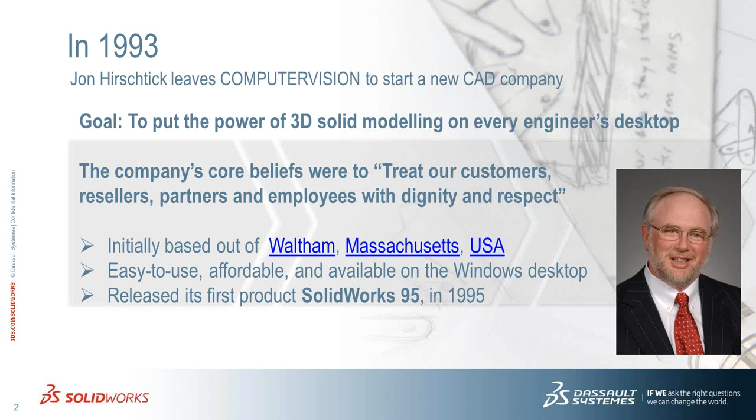They released their first product in 1995. I think they started development in '93, and the first product came out as SolidWorks 95 in the year 1995. It was easy to use, affordable, and available on Windows desktop, which at that point of time was unheard of.

Today we are looking at SolidWorks 2014, the latest release, and throughout these 22 releases, the SolidWorks development team has continued to exhibit four different traits. They continue to put the user first—as I said earlier, at least 90% of the enhancements come from user requests. The goal was to create a single unified user experience across functionalities like parts, assemblies, drawings, and even simulation and design automation. Everything happens in a single window, which was again a first of its kind—taking the impossible and making it really easy to use.

That is something you notice in SolidWorks if you've been following it for quite some time. Over the course of time, they have built a very incredible community. I'll talk about the community, how big and vibrant it is—it can be users, developers, or resellers. It can be anybody, but the community is very strong, and they help each other out in more ways than possible.

So let me talk about SolidWorks 95, the first ever release of SolidWorks. This was a game changer, because they changed the platform from a Unix-based system to a PC Windows-based system. By doing so, they brought solid modeling to every engineer's desktop, and the cost came down from a mammoth $18,000 to $4,000.

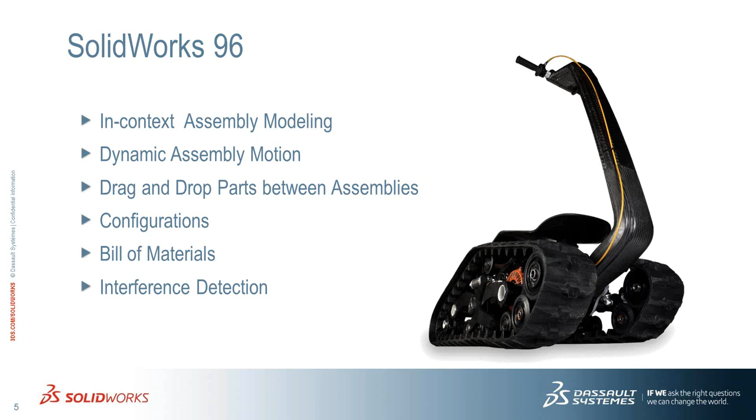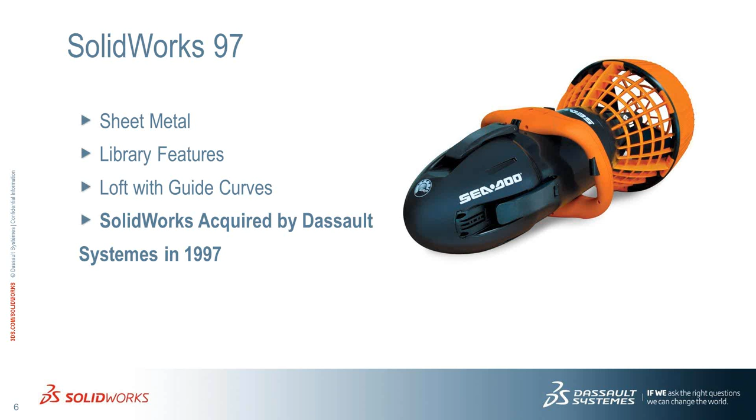In 1997, they introduced sheet metal functionality and started developing the design reuse part, which revolves around things like library features, where you can save a particular feature in your design library and reuse it whenever you want. They also had new functionality - loft with guide curves. This was the year SolidWorks was acquired by Dassault Systemes, in 1997. Dassault took over SolidWorks, but SolidWorks retained its own identity - the corporate headquarters stayed in USA, and the development team is still based there.

Then we had SolidWorks 97 Plus, where configurations were extended to sub-assemblies and assemblies, and you had customized exploded views. Also in 97 Plus, a new product was introduced called SolidWorks Viewer, offered free of cost. Today we take these viewers for granted, easily downloadable from the internet. But back then, being able to view a 3D CAD model on any desktop without any cost involved was a pretty revolutionary development.

There was also some more enhancement around welds and face fillets. By the way, if you've noticed, I've put some pictures on my screen which are all designs from our customers - they're all rendered inside SolidWorks. I'll talk about rendering when we come across it. So if you're wondering what those pictures are about, those are all rendered SolidWorks models or designs.

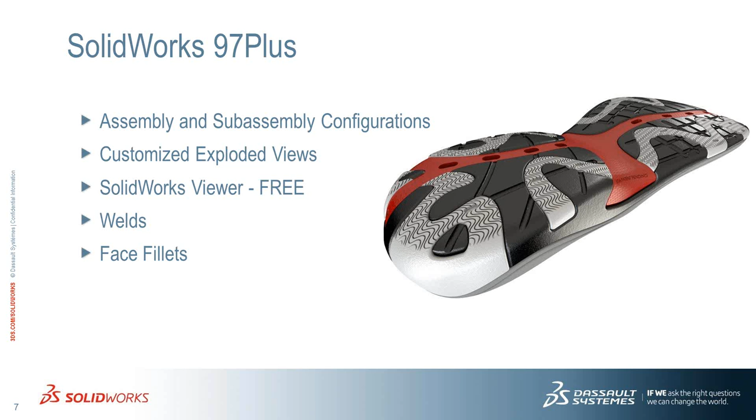In the year 1998, we introduced Feature Palette. This is again a very interesting feature. It's not there in its own original form today, but it has been modified. And they introduced sketch diagnostics.

Back in the day, in 1998, most of our SolidWorks customers came from AutoCAD. So when you're in a 2D environment trying to create profiles and you end up missing something, your sketches are open, so problems like this were easily fixed using sketch diagnostics. And we had assembly envelopes and some tangency control for lofts and sweeps.

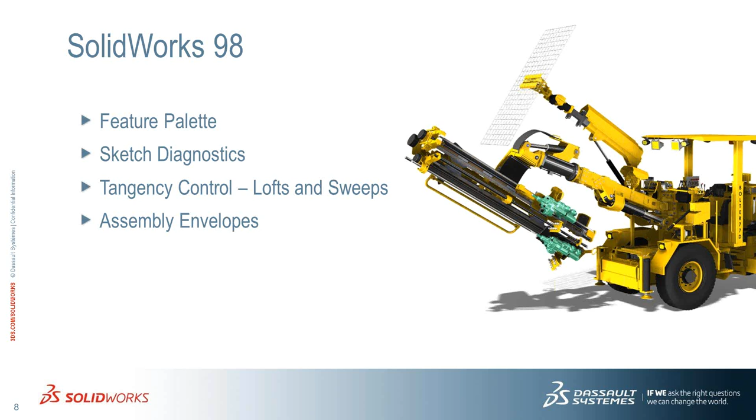98 had one more release, 98 plus. Here we introduced SmartMates. SmartMates continues to be one of the very strong points as far as assembly modeling is concerned. We can just drag and drop the component, and SolidWorks will figure out or suggest a mate that is right. If you want to overrule it, you can do it, but it gets it right most of the time.

By the year 98, assemblies got bigger, so the hardware could only support so much. So you need things like making the assemblies lightweight, making the designs lightweight. So they introduced something called lightweight components.

98 plus was a year release where they introduced surfacing and also something called FeatureWorks, which still continues to exist today. This was very important, very critical, because you have to have the ability to talk to other CAD formats.

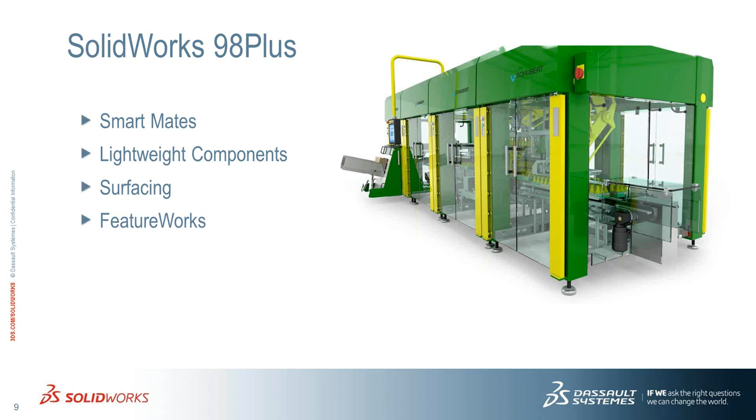You need to have that ability to translate or import other CAD formats, because before SolidWorks there were a couple of other 3D CAD packages, and you already had so much 3D CAD data. So to be able to convert those customers into SolidWorks, you need this functionality, called FeatureWorks, where you can bring in other CAD files and recognize the features and store it in native SolidWorks format. This was very critical to be able to capture most of the audience.

And in 1998, they introduced the first ever Certified SolidWorks Professional exam. Back in the day, it was a written exam where you had to be physically present at a reseller office or at SolidWorks to give this exam, and you'd be given some models to design, and then you'd be graded on them.

So it was a pretty lengthy process, and a lengthy exam as well. I think it spanned around 8 hours, if I'm not wrong. But now it is much simpler. It has gone online. You can take the exam right from your living room.

It's a very big development from 1998, and also the first ever SolidWorks World was held in Palm Springs in the year 1999.

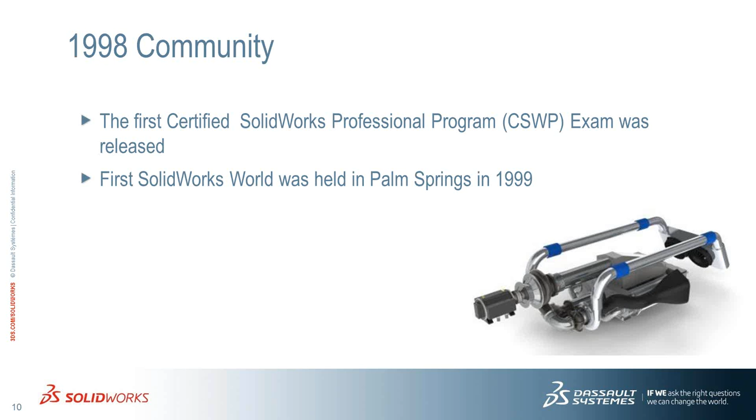If you are aware of this, SolidWorks World is an annual event where SolidWorks brings its entire community together. That involves the SolidWorks team, the reseller teams, the partners, the customers, even the education community as well.

And in the year 1999, SolidWorks introduced real-time collision detection. This is a feature where when you have motion built into your assemblies and you move around components, it will detect a problem like a collision, so that you can get your assemblies or designs right the first time.

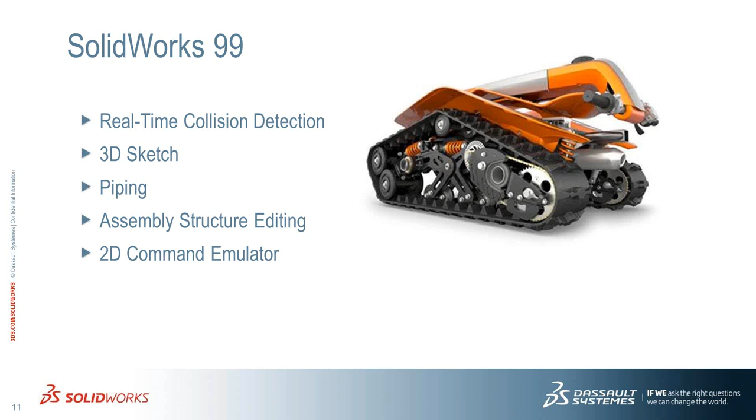This was a year where 3D Sketch was introduced, and with that came the piping functionality. We also had a 2D command emulator. Also, the assembly structure could be edited.

2000 was a big release because it brought in a lot of functionality, quite interesting, quite popular at that time. Even it continues to be very popular today, is something called eDrawings, using which you can share your 3D designs or 2D designs with anybody in the organization. You don't need to have a CAD license on that system, and it's a free-to-download product from day one.

And we have a brand new Hole Wizard interface in 2000, which allowed you to use standard holes complying to a lot of different standards like ANSI, ISO, and Indian standards.

Surfacing was developed, and the first ever SolidWorks Explorer was released. It continues to exist today. It's a very neat application. I find it very useful as compared to the regular Windows Explorer. As I keep telling people, Windows Explorer is fine for your Microsoft Office files or regular Windows files, but when it comes to CAD data, you need a specialist, and that's what SolidWorks Explorer is all about.

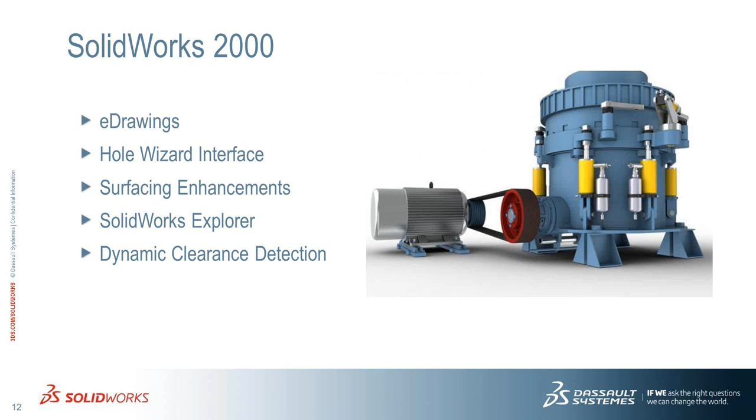And in the year 2000, they introduced something called dynamic clearance detection. I think a lot of people still are not aware of this functionality. It's a very interesting way to figure out the clearance. If you have moving components and want to do it dynamically, it will predict the minimum clearance at any given point of time and the maximum clearance.

In the year 2001, we introduced mirror components, and the user interface was revamped, and you could start seeing that the user interface is getting much easier to use. The heads-up user interaction, where you have the contextual menus popping up as you keep modeling or as you keep going about your day, reduces the mouse movement to a great extent, and it also speeds up your design process. And in the year 2001, you have flexible subassemblies, which is very important to be able to predict the accurate motion.

And for the first time, we had an import wizard developed for your 2D files, DXF or DWG files, using which you can convert your 2D to 3D very easily. And 2001 Plus was also on similar lines. You had more and more physical dynamics added into the system. So now, if your components have moving components, you have things like gravity and friction built in, so that you're trying to predict the actual behavior of your components in real working conditions.

As I said, the assemblies got bigger and bigger as we delved into a lot of different verticals like power, process and plant, and oil and gas. So there was a need to develop something like a large assembly mode, which again today is quite popular. You can use it to load your files faster, to work with them faster. And 2D to 3D glass box functionality was introduced here. This was very critical because most of the customer base was coming from 2D. So we had to give them something to convert their 2D models into 3D very easily. This is a functionality where you can bring the 2D drawing into the SolidWorks sketch environment and use the glass box functionality to bend those views and create a 3D model out of it.

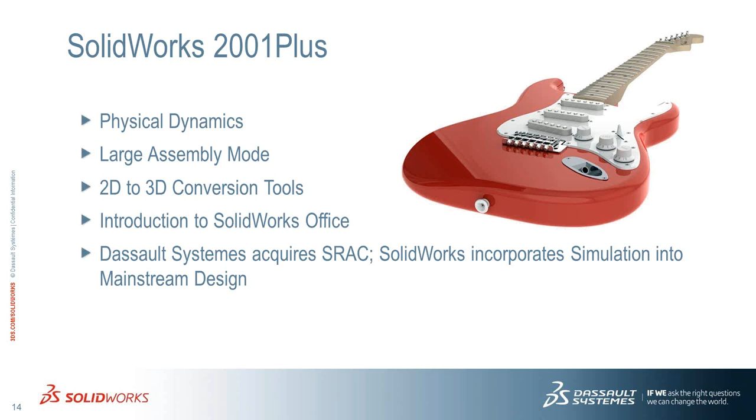And this was the year the new product called SolidWorks Office was introduced, and also in the same year, Dassault Systemes acquired SRAC, which brought simulation into mainstream design. I think this was the biggest development around that time, because back in the day, simulation or analysis was a huge giant, which was nowhere related to CAD because it existed independently and the teams were different. But the vision of SolidWorks was to put the power of analysis or simulation into the hands of the designers, and now that you look at it, you can say that they were very successful in doing so.

Next release was SolidWorks 2003. The first Express tool comes out in the form of COSMOSXpress, which today is called Simulation Express, using which you can do part-level structural analysis, where you can figure out your stresses, the deflection or the displacements in your parts based on, let's say, the loads applied and the boundary conditions.

And also a brand new web portal called 3D ContentCentral, which is a repository of all the standard components that you buy off the shelf, was created. The idea was that if you are buying, let's say, 20 to 30% of your components from outside, you don't have to design them. Let the people who are selling the components design them and share the data with you so that you can use them straight away in your designs.

And Contour Select was introduced in 2003. I'll show you some of the enhancements and talk about Contour Select and how it is used. And multibodies were introduced in 2003 along with PDMWorks, which is data management. When data becomes huge, you need a way to manage that data, so that's how PDMWorks got in. And the new product called SolidWorks Office Professional was released. Now we don't call it Office anymore. It's just SolidWorks Standard, Professional, and Premium.

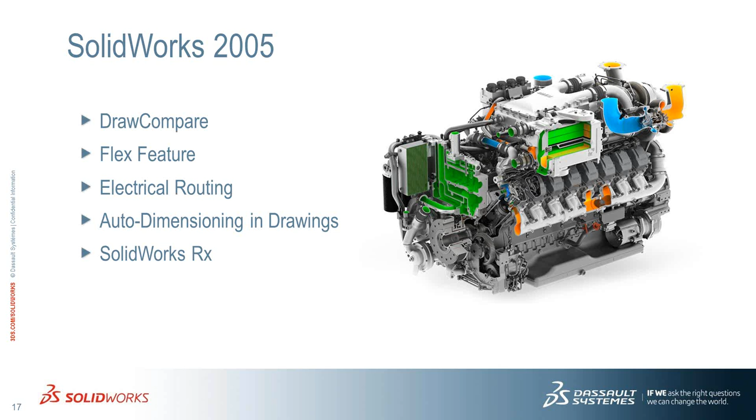So same thing with any application, especially engineering intensive applications like SolidWorks. They got stabler over the period of time, and to be able to support the customers and the resellers or even the developers to pinpoint or diagnose the exact issue, whether hardware related or software related, SolidWorks RX was introduced, and even today we continue to use RX in a very efficient way to diagnose and pinpoint the problems.

2006 was a big release because I remember smart components came into picture. This again saved a lot of time. I don't know how many people use it today, but it is one of the essences of using SolidWorks, especially in assembly mode where you have lots of different components. SolidWorks will try to help you as much as possible. Smart components is basically making your components intelligent, storing information in them.

Like, let's say if you drag and drop a gearbox, it should always come with some fasteners and some fixtures along with it. So these kinds of things made life really easier and simpler. And also sketch blocks were introduced for layout design. Display states, again, a very useful item, I believe. Configurations were always there, but display states help you create different visual modes for your assemblies that enable you to focus on a particular area of your assembly to work faster and easier. Design checker was introduced.

This still continues to be very popular, and you can check your drawings for consistent, let's say, fonts or some standards that you can enforce, or make sure that all the teams across the organization use.

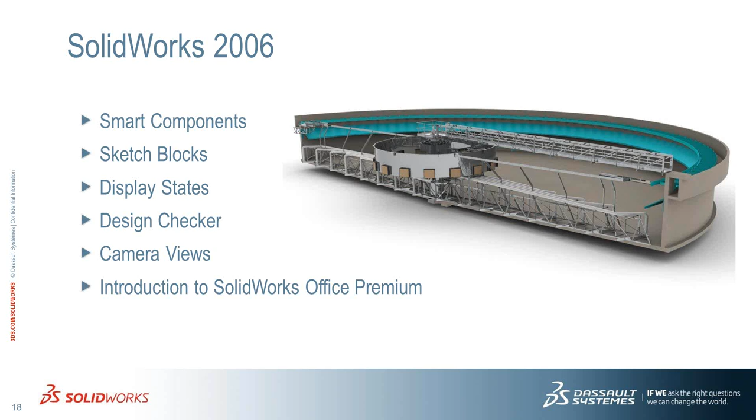In the year 2007, we had a lot of new functionality in the form of SWIFT. These are basically expert tools that you can use to make things faster, quicker. New functionality was introduced in assemblies like belts, chains, and gears. This was very, very useful for people who are into machine design.

Freeform was added to your surfacing capabilities, and you have SolidWorks Enterprise PDM released in 2007. And also some reverse engineering capabilities in the form of ScanTo3D were introduced, where you can bring in point cloud data and build your surfaces or solids out of it.

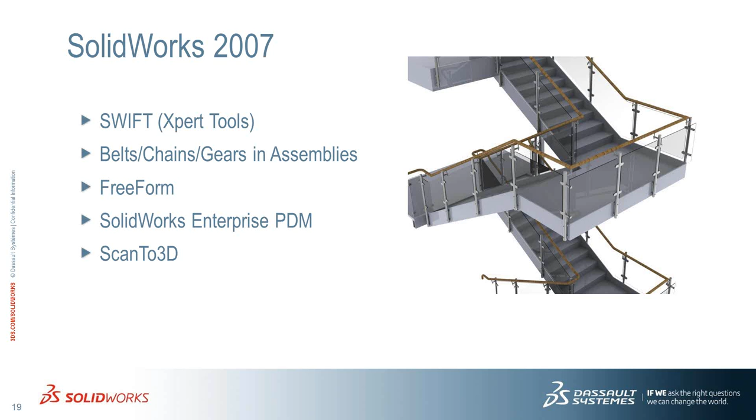2008 saw a major change in the GUI, where the user interface became very, very easy and very clean, if you will. And Instant 3D was introduced. I think I'll show Instant 3D, which continues to be very popular again.

What it allows you to do is work on your designs with confidence without depending so much on commands or menus. You can just work on your designs within the graphics window and graphics area, to be able to design faster.

Tolerance stack-up analysis was introduced again in 2008. This is part of SolidWorks Premium today. When you talk about form, fit, and function, things like tolerance analysis will help you to get your designs right the first time. A lot of rework used to happen because a part is not fitting, or it's not behaving the way it should be behaving. All these things were cut down with the help of more and more validation built into the system.

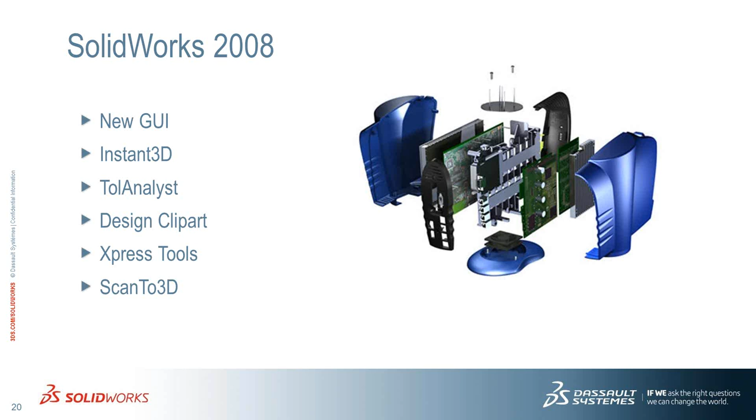PhotoView 360 was taken over. It was a separate application back in the day in 2009. Now it is integrated inside SolidWorks. Back in the day, I think it was called PhotoWorks, if I'm not wrong. So it continued to be a photorealistic rendering module shipped along with SolidWorks, using which you can create fantastic images of your 3D models.

This was pretty groundbreaking again, because if you are into consumer products and, let's say, medical devices or any other product design, what you would typically be doing is getting prototypes out and then going for very expensive photo shoots to get your photographs for your marketing collaterals or websites, things like that. But with the help of PhotoView 360, now the customers are able to get a very realistic perspective on how their models will look even before a single prototype was made.

SpeedPak, which is still, I think, a very underrated and underused command inside SolidWorks, was introduced in 2009. What SpeedPak does is it enables you to only retain the information that you need. Let's say you're into power plants or oil and gas, and you're getting your skid from outside. You can just load it in SpeedPak mode, so that you can refer to the flanges that you need, and the rest of the assembly will be unloaded out of the memory, so that your assemblies still tend to be lightweight and you can work faster and quicker.

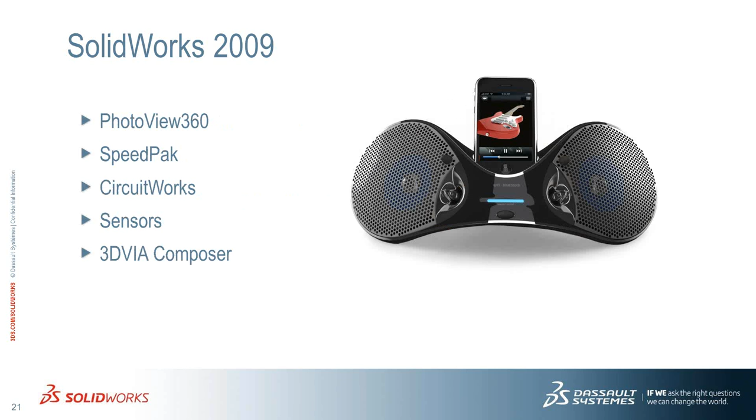3DVIA Composer, a technical documentation solution, was introduced in 2009, which today is called SolidWorks Composer. It enables you to create your technical documentation, things like user manuals, service manuals, even animations. So the idea was to give the customer a whole spectrum of solutions, not just 3D CAD, but all the other complementary offerings like data management, technical documentation, simulation, etc.

2010, we saw SolidWorks Sustainability. This was the first again across all the CAD platforms to be able to bring the green design principles, the life cycle analysis principles into the design. These days, customers and clients are looking for greener and greener products, greener designs which are eco-friendly and which are not too harmful to the environment. So you can use SolidWorks Sustainability to evaluate the impacts of your designs.

Rapid dimension was introduced, which helps you to detail your drawings really quickly. We'll take a look at rapid dimension. We'll take a look at some of these functionalities now. Event-based motion simulation was also introduced, which is again quite powerful if you ask me. You can replicate the behavior of the conveyors or things like pick and place robots, etc.

Mouse gestures. This is one of my hands-down favorite features of 2010. I still continue to use it in a very efficient way, so that my design speed goes up multifold. Actually, the way mouse gestures was introduced is very interesting. They had a survey which was conducted, which actually tracked the mouse movement of the user over a period of time, and then they introduced something like this, so that you don't have to go and pull down a menu or go into the command managers each and every time you needed a

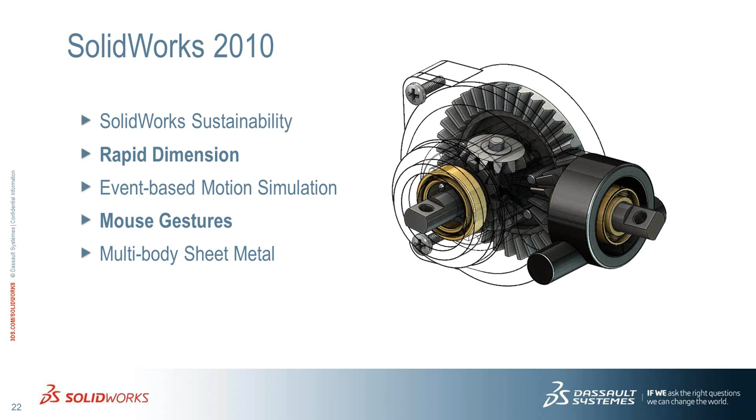command. With the help of mouse gestures, you can configure up to 8 different commands for each mode: part, drawing, and assembly mode, so that you can have these things at your fingertips. Multi-body sheet metal was introduced in 2010, which allowed you to develop multiple sheet metal components in the same part window.

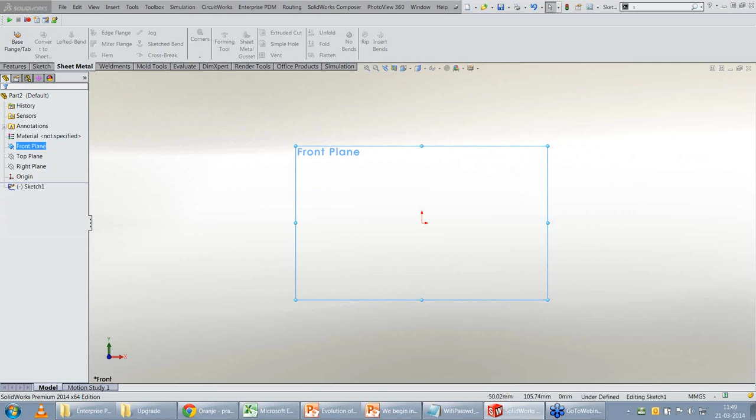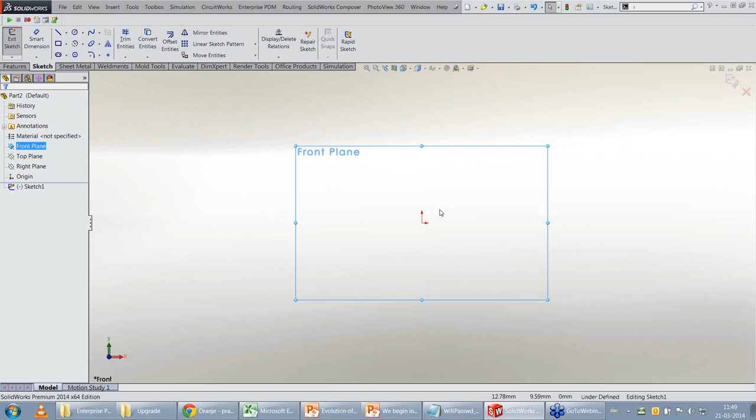Yeah. So what I was showing was something called mouse gestures. Let's say you're in sketch mode. So there will be some 5-6 commands that you use most often. Things like line, let's say trim command, or maybe a dimension command. So these things can be customized and they can be put on your fingertips, so that you don't have to go and launch them from your command managers or even shortcut toolbars. So both of them are very useful to speed up your design process.

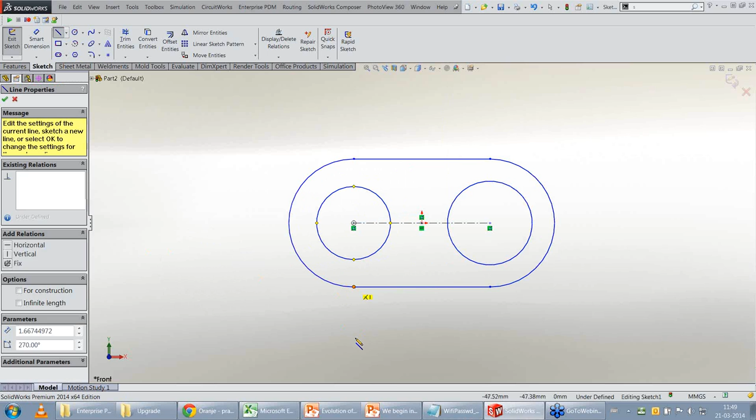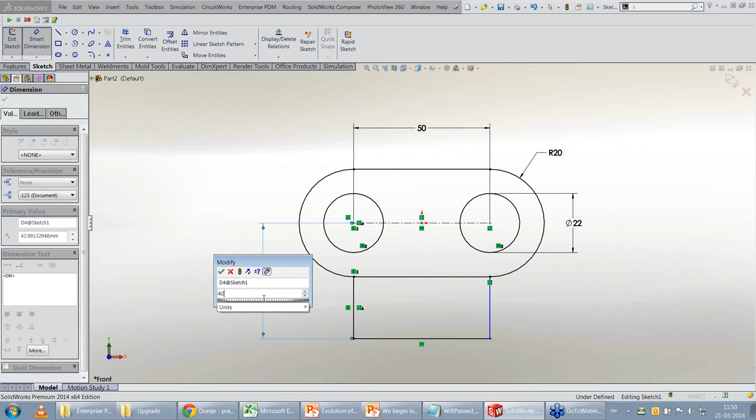Like, let's say you want to create a simple sketch and dimension it. So with the help of mouse gestures, what you can do is you can quickly add some detail. And you can see that SolidWorks will help you with the contextual menus, and let's say I want to dimension it now. So I can quickly launch these dimension commands. And once I come out of the sketch, you will see that my mouse gestures are now different. So it is mode specific.

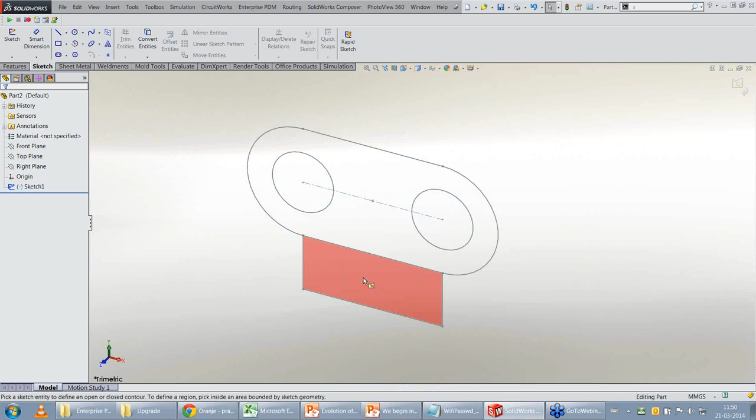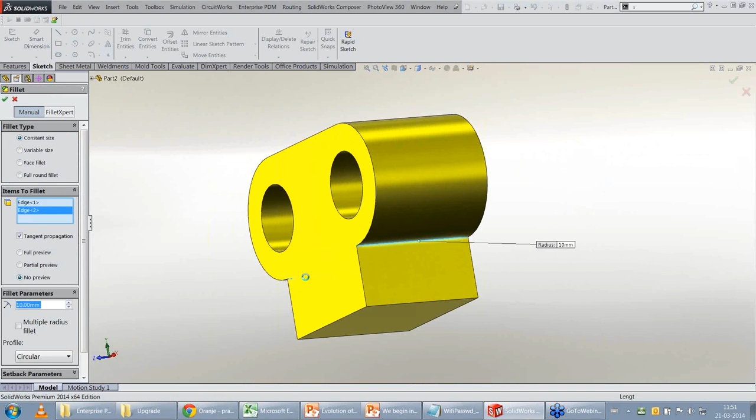Like in part mode, I have the views that I need, and I have let's say some hole wizards and some fillet commands. So I'll use something called contour select now. This is again a feature which was in use, using which you can select multiple contours. And you can hide this now. And let's say now you're in part mode, so you need fillets. So you have the fillets, and you have Instant 3D.

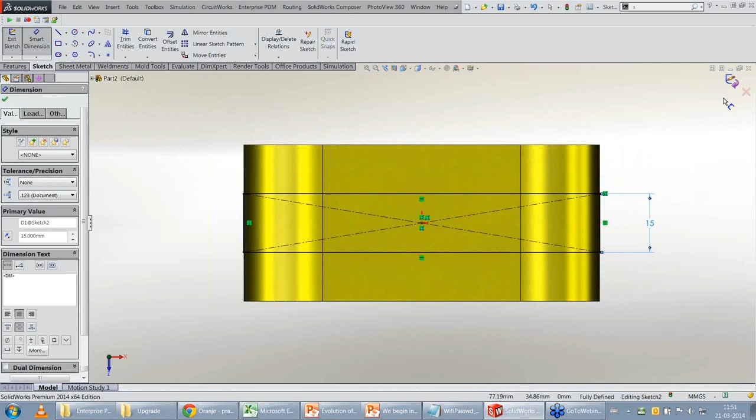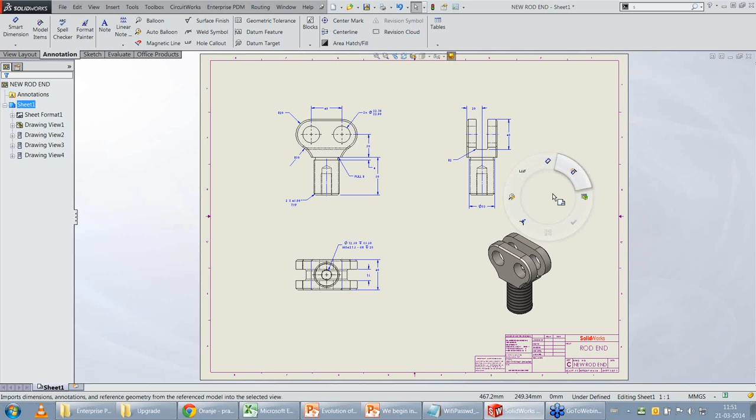This is Instant 3D where you can add or you can change the features very dynamically. This is almost similar to your direct editing. And you can select silhouette edges. This was again not possible back in the day. So this green arrow you see on the screen, this is Instant 3D. You can add or remove geometry. And we can add more detail, but at this point, you get the picture. So in different modes, you have different mouse gestures. So again, when I'm in drawing mode, you can see the mouse gestures are different. I have bill of materials, I have auto balloons, I have a hole callout, I have chamfer dimensions, etc.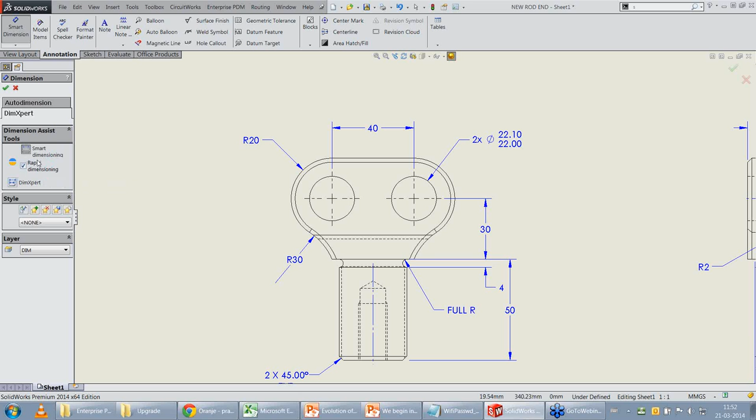So let me show you rapid dimension, which again was introduced in 2010. Rapid dimension is a command that allows you to position or, let's say, place your dimensions in a very easy way. So this command can be found in your regular dimension tab. There is just a checkbox that is by default checked. So let's say I'm trying to create one more dimension here just to show the symmetry. So between these two holes, I'll select my first reference, I'll select my second reference.

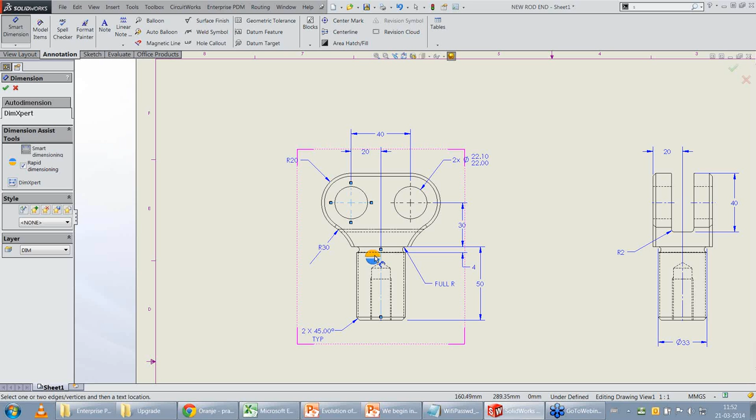As soon as I do it, you see these colored circles, semicircles. Those help me to place the dimension. So I don't have to worry about the dimensioning part. SolidWorks will help me with this. So it's asking me if I want to place a 20 dimension above or below. Either case, it's helping me in the placement part of it.

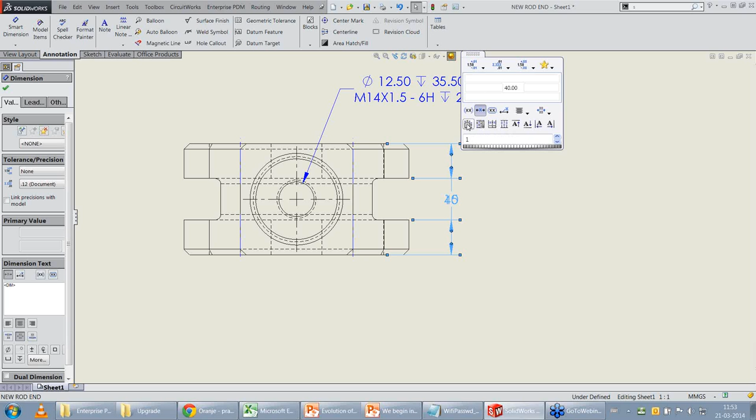And one more command called auto arrange. Let's say you have a messy sketch with a lot of dimensions. What you can do is you can use this auto arrange dimensions. Just select the dimensions, go into the dimension contextual menu where you have the first feature called auto arrange. Click on it, and SolidWorks will evenly space the dimensions for you. Very, very useful feature if you deal with pretty complex detailing in your drawing.

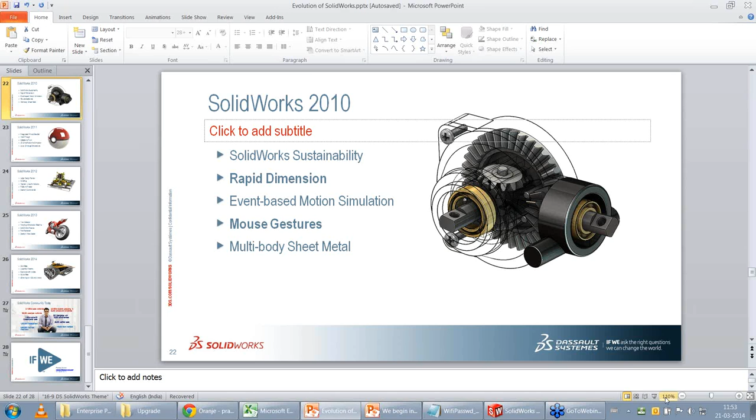So those are the two enhancements I wanted to point out in SolidWorks 2010. Let's go to 2011 and see what we can take a look at. I think I covered auto arrange. So now let's talk about PhotoView.

Photo View is the part of SolidWorks where you can render your designs within SolidWorks. It continues to be a part of SolidWorks Premium and Professional, but it's not available in Standard.

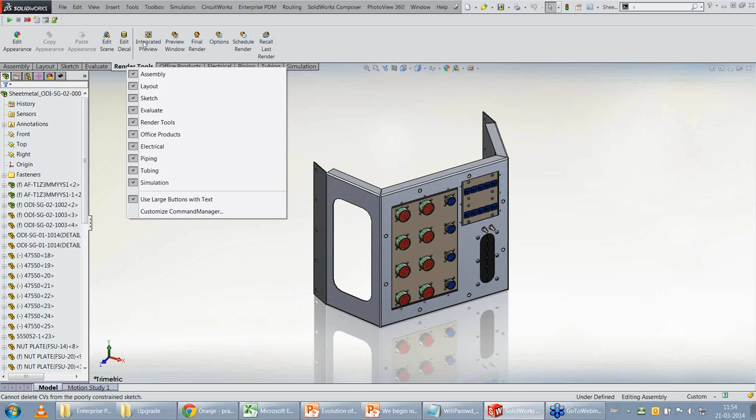You have this Render Tools command manager tab in which you have these features on the right. These are a part of SolidWorks Photo View 360.

It's very simple. All you have to do is go over your appearances. You apply each material to each component as you design, and when you apply the material, a proper appearance will be applied.

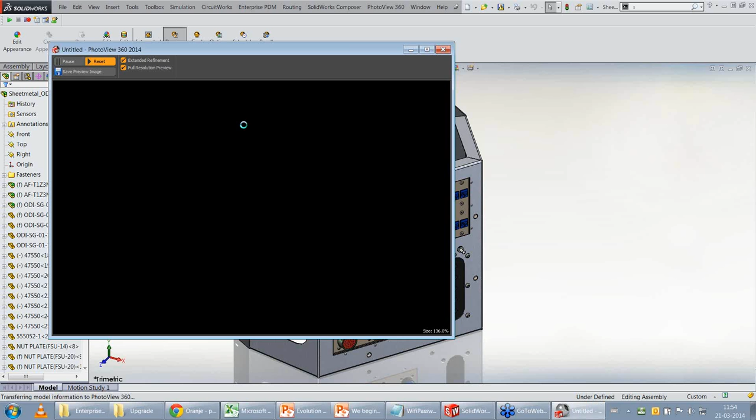Using this functionality, you can create lighting effects and cameras, and render the SolidWorks models in a photorealistic way. SolidWorks will apply appearance properties, textures, and decals, and it will render very quickly. This is a preview window that is loading.

So you can get very high quality, high resolution images for your marketing collaterals, let's say websites or brochures, etc. This is SolidWorks Photo View 360.

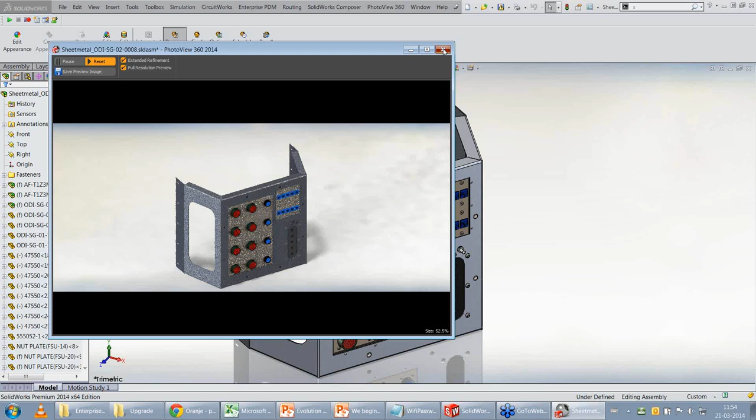Let me show you a couple of rendered images. You can create fantastic looking images by using Photo View 360.

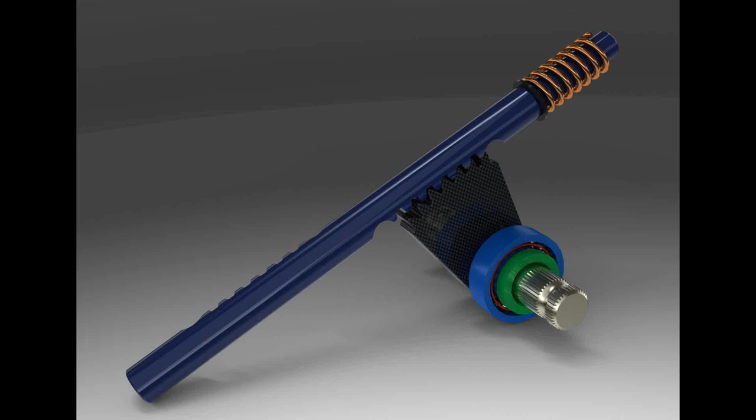So let's move on, I think we are running out of time. Let me quickly cover some ground here.

The Defeature tool is very simple. What it does is it helps you protect your IP. You can remove some detail before you share a design with your customers.

In 2012, as I said, costing was introduced. Let me talk about costing because I think this is a very interesting and useful feature. Let's say you are into sheet metal components and you want to estimate the cost of production of this particular component.

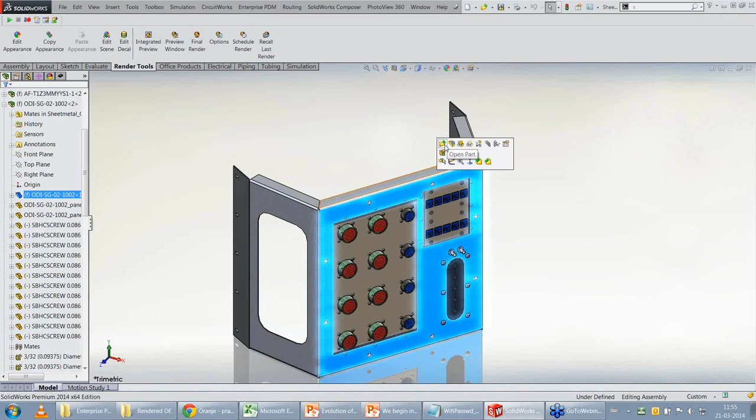What you can do is launch your costing module from SolidWorks, and SolidWorks will automatically detect that this is a sheet metal component, and it will launch the sheet metal template.

The template is set up previously. What it does is it has all the raw material cost, it has got the manufacturing costs.

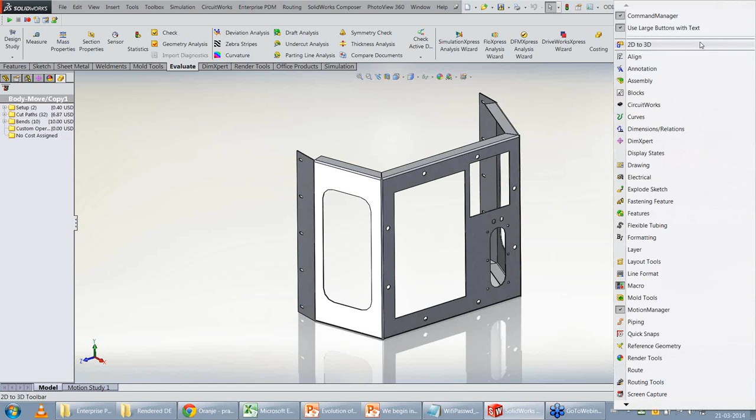So this is a sheet metal costing window on the task pane, and here you can see that SolidWorks has figured out the material cost, the thickness, the cost based on the thickness, and based on the geometry and the number of operations.

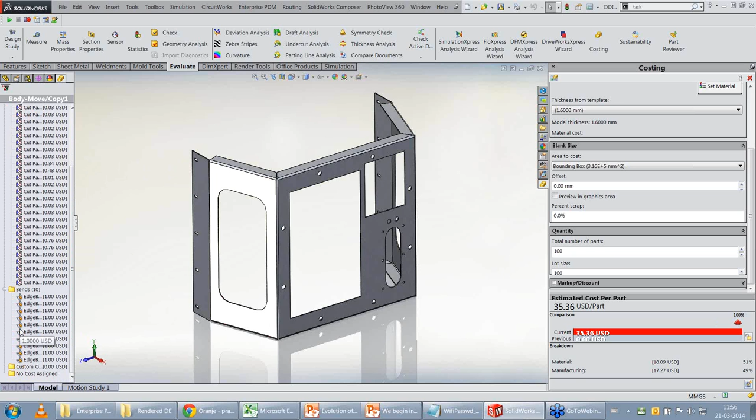You can see all the operations involved, the cut paths we have, the number of bends we have, 10 bends, and let's say you have some custom operation like powder coating or painting, you can include that as well. So it's all about setting up your templates very carefully.

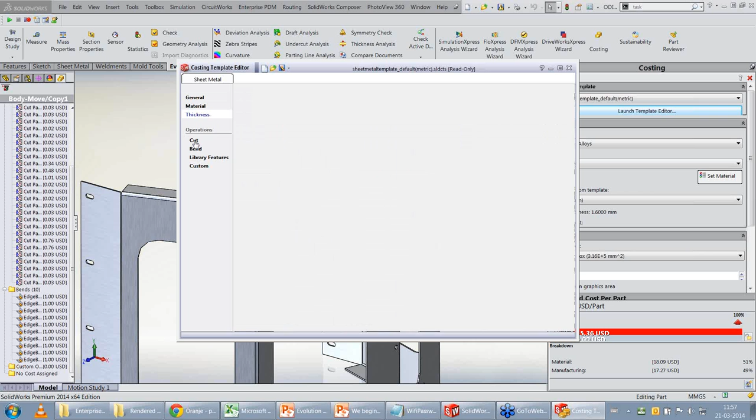Let me quickly show you one template. This is the template. You have units, you have materials, you have raw material costs for different thicknesses of sheets, and operation costs for cutting, bending, and library features like louvers, and also some custom operations like painting and inspection costs.

You can include all of them, and you can quickly arrive at an accurate estimate of the cost of your production. And what you can do is you can do a quick what-if analysis as well.

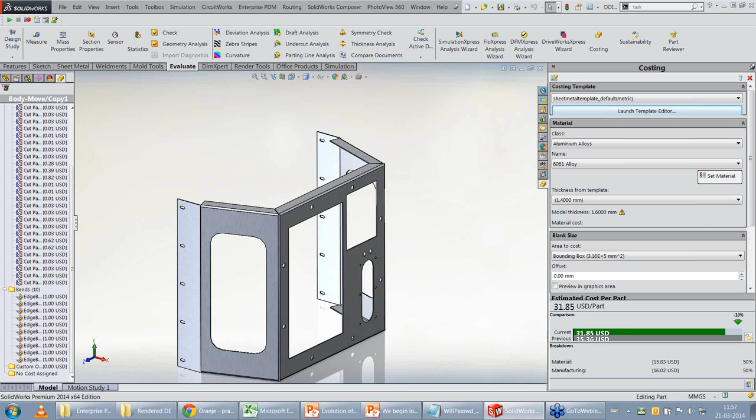Like let's say, what if I change the thickness of this component from 1.6 to 1.4? Your cost will go down based on the inputs that you have given or predefined in the templates. So here you can see there's a 10% reduction in the cost.

This is good. This is available both for sheet metal as well as machined components, so you can get a head start on your cost estimation. And up next, what I wanted to talk about was search commands.

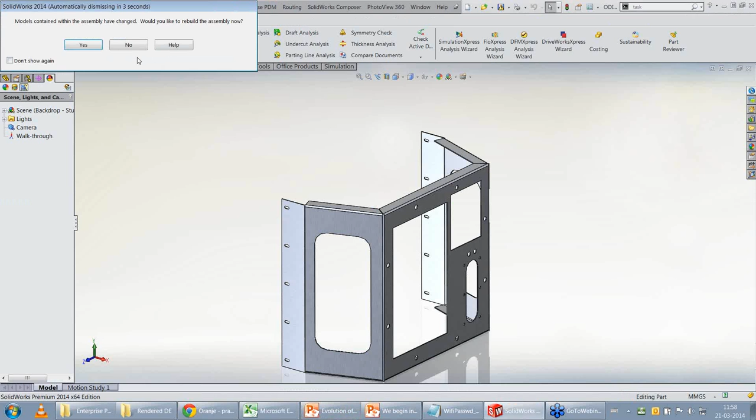I'll show you this because if you are using SolidWorks and you want to, let's say, launch a hole alignment, but you don't know where it is, instead of spending time in the search window, command window, help windows, and figuring out some training manuals, you can quickly start by typing 'hole' in the search window.

SolidWorks will bring all the features that match with this text keyword, so now I can launch hole alignment from here, or I can even locate it.

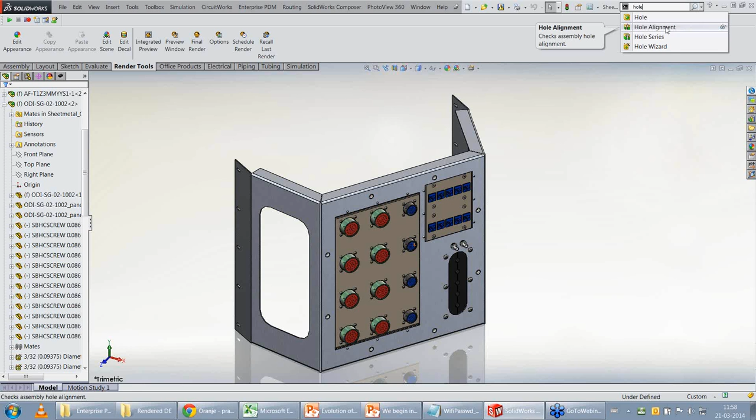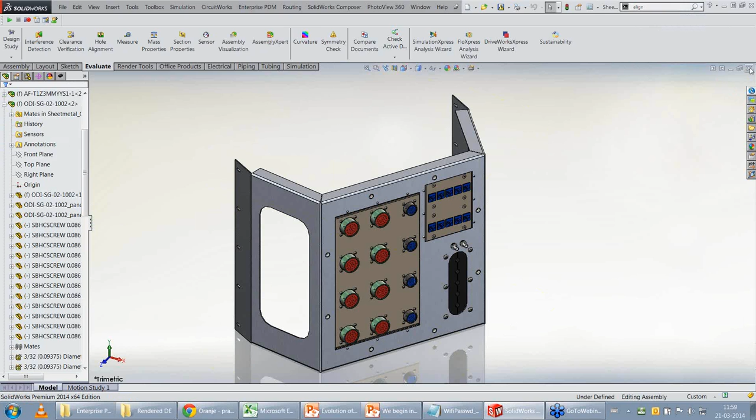So what SolidWorks does is point out and show you where this particular hole alignment is present. It's pointing to the Evaluate tab, showing that the hole alignment is here, so next time you want it, you can just locate it from here. Or if you're just interested in launching it, you can quickly click on that and it will launch the command as well. A very useful time-saving feature, especially for first-time learners or beginners of SolidWorks.

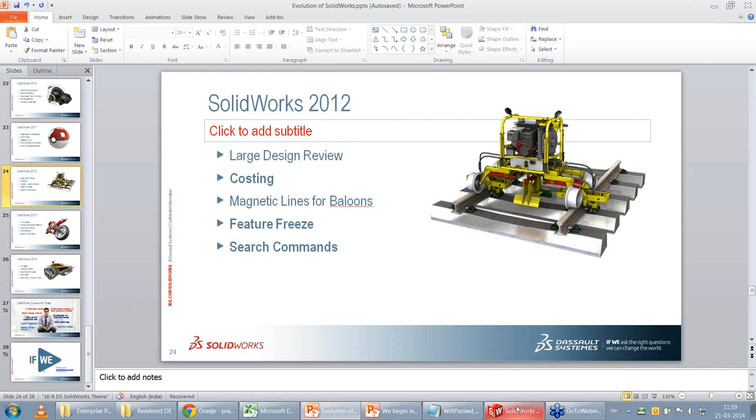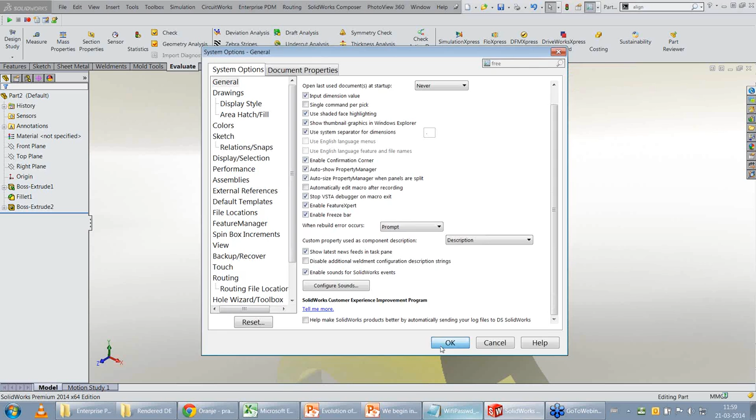Feature freeze, let me show you how it works. So here you have three features. If you want to use feature freeze, you need to enable the feature freeze bar. In your system options, general settings, you have the enable freeze bar option. Once you do it, you'll see this yellow bar on top.

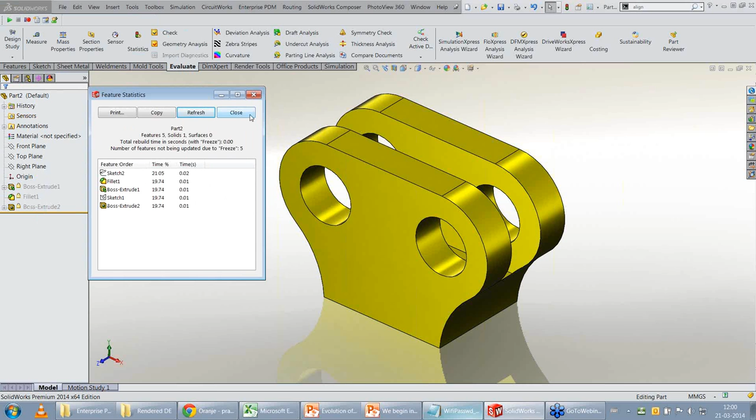It's similar to our rollback bar, which is blue and present at the end of your feature history, but this one exists on top. You can drag and drop it and place it where you want to freeze the features. When you freeze them, you'll see this lock icon on top of it. Next time when you're rebuilding, your rebuild time will be zero, so you don't have to wait for a ridiculously long time. This is very useful for components with a lot of detail, like a lot of patterns or holes.

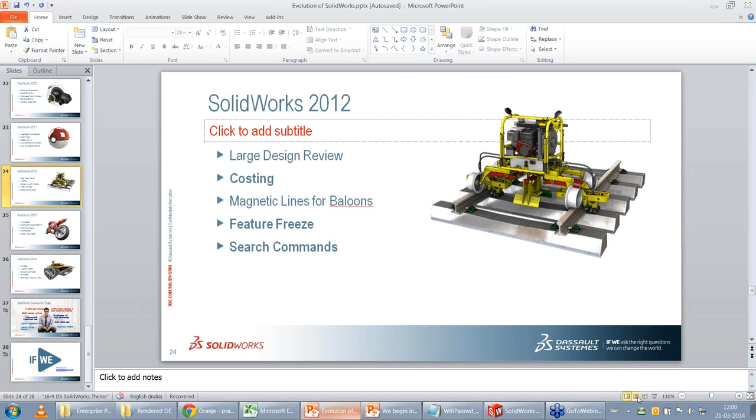Next up, I want to talk about magnetic lines for balloons. It's pretty self-explanatory so I won't go into detail. It's very similar to what we have in 3D VIA Composer.

Now let's talk about 2013 enhancements. We have varying dimension patterns.

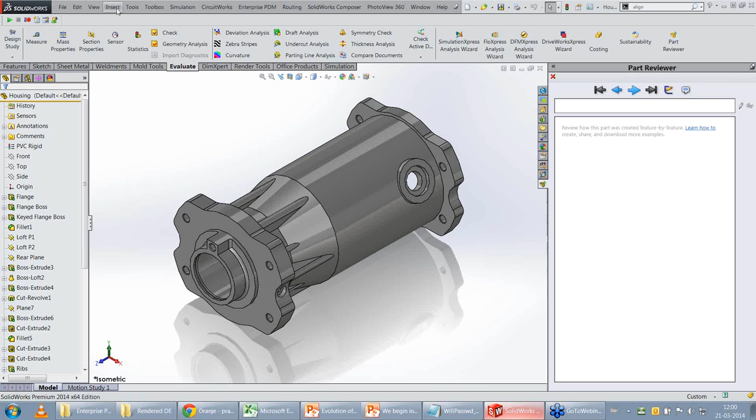Let me talk about part reviewer first, then we'll go to varying dimension pattern. Part reviewer is a simple enhancement that helps you take someone through how a particular component was modeled. You can launch the part reviewer from your Evaluate tab, or go to your Tools menu and pull down the part reviewer command from there.

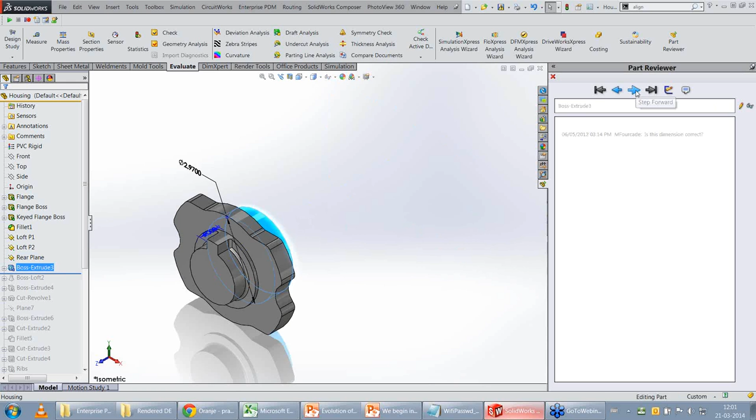You can roll back to the first step and start a step-by-step detailed instruction of how each feature was made. You can even add comments and timestamps as you're adding reference geometry and feature after feature. It's a nice way of evaluating or revisiting how a particular component was designed, taking you through each and every feature and reference geometry.

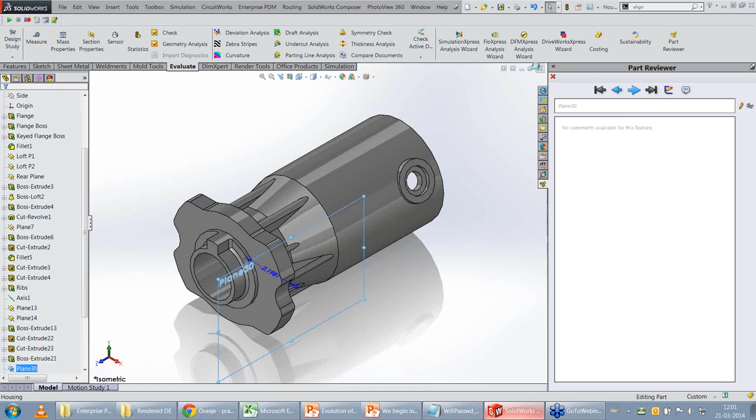So this is part reviewer, and now I wanted to show you varying dimension pattern.

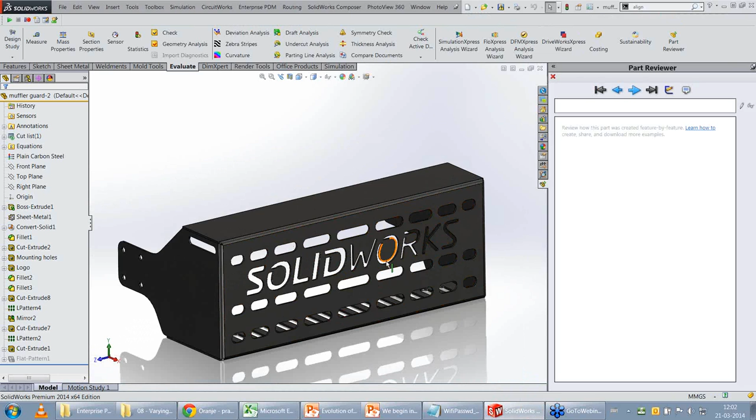Varying dimension pattern is again a customer-driven request. If you have dimensions that are varying, like in this case you see the slots which have varying length from slot to slot or width from slot to slot, instead of a fixed pattern, you can vary both the spacing as well as the dimensions.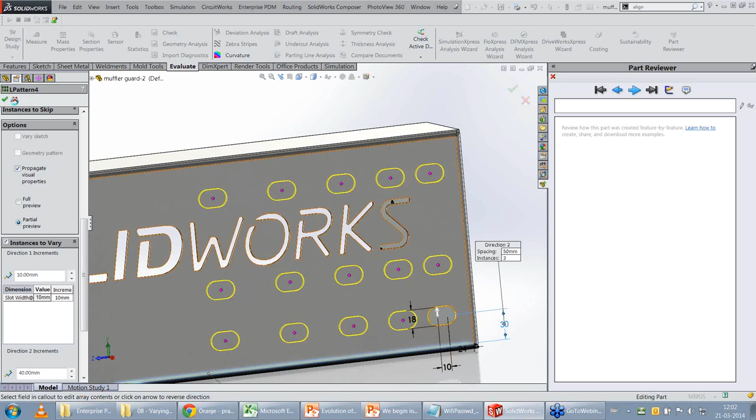You can see the spacing increasing as well as the width of the slot increasing. Similarly, if you look at the pattern on the bottom, we've taken one seed item here at the middle, and then decreased the width of the slot in either direction. So you can capture this and go with a 10 mm increment here, negative 10 on either side.

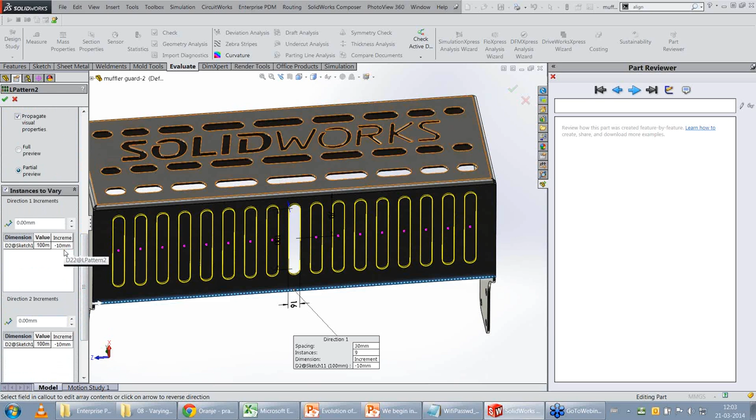It's very easy to use. I could create one and show you, but it's quite simple. I think we're running out of time here.

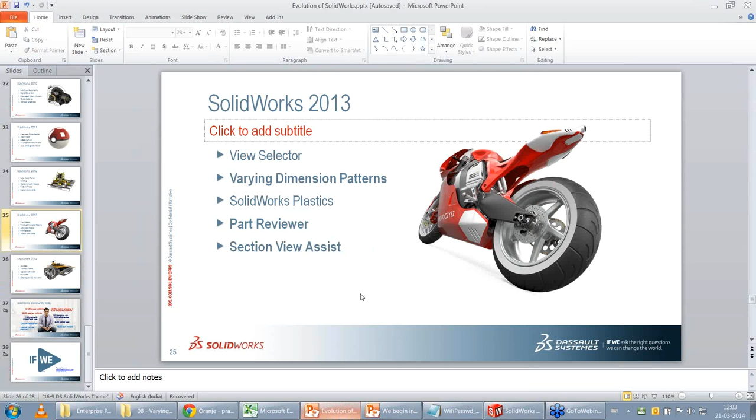Section view assist, do we have time for this? Yeah, section view assist is a brand new way of creating your sections. It's a very simple and easy to use interface now, where aligned sections or offsets, everything is put into one single window, and it's very powerful and easy to use as well.

And in 2014, we have slot mate. Let me just quickly show you the slot mate.

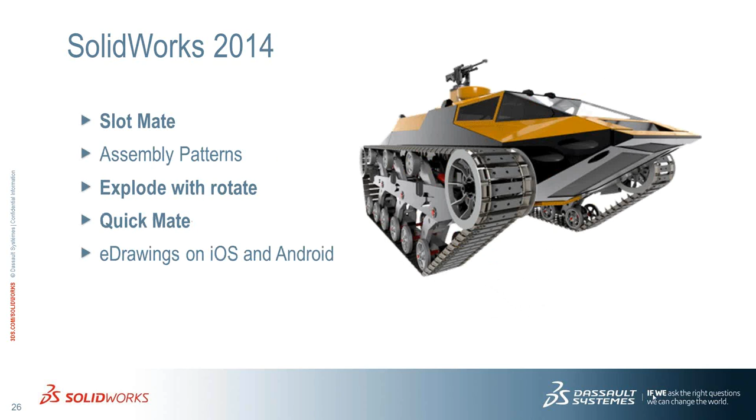So if you are using slots regularly on a day-to-day basis, you can start. Previously, you had to do so many different things, but now you have only one mate, SlotMate, which will ease up this mating process.

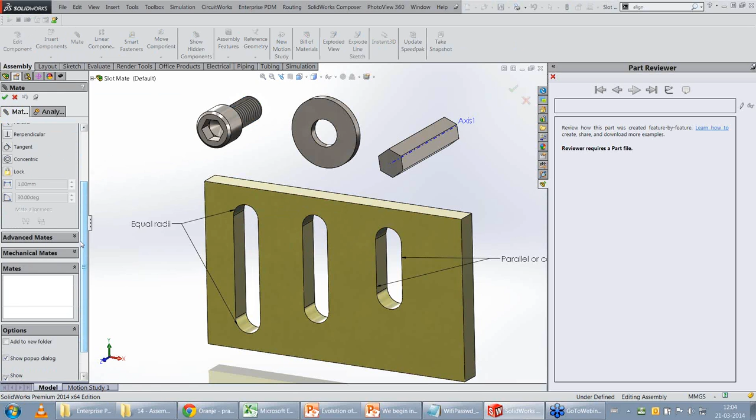All you have to do is select the geometry, and SolidWorks will place it. You have a couple of different ways of constraining it. One is you can go for the free constraint, so that it will move within the slot. You can also edit this.

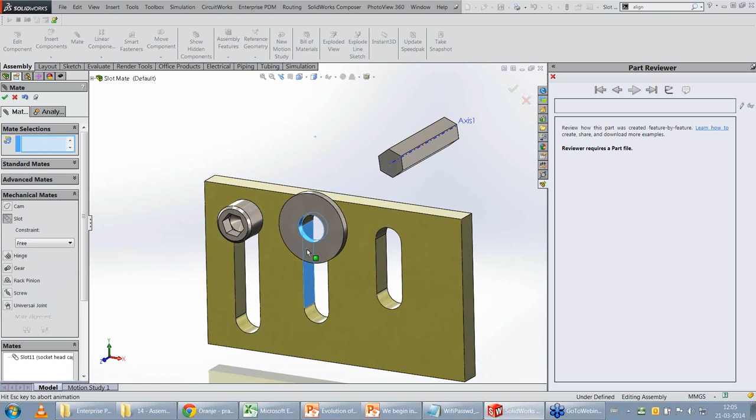Let's say you want to place it in the center, or at a particular distance along the slot, like 15 mm in one direction, or you can flip the dimension and put it on the other side. Same thing with the percentage slot, 30% on this side or 30% on that side, or you can leave it free. You can also do different types of slots here, circular with a slot, and also axis.

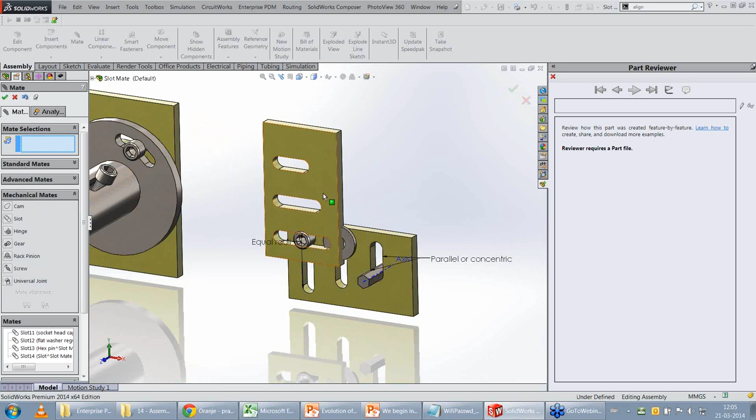You can also do a slot with another slot. This will give you an entire range of motion. Like if I pick this surface, it will move in all the other 4 directions, and it's behaving the exact way it should behave.

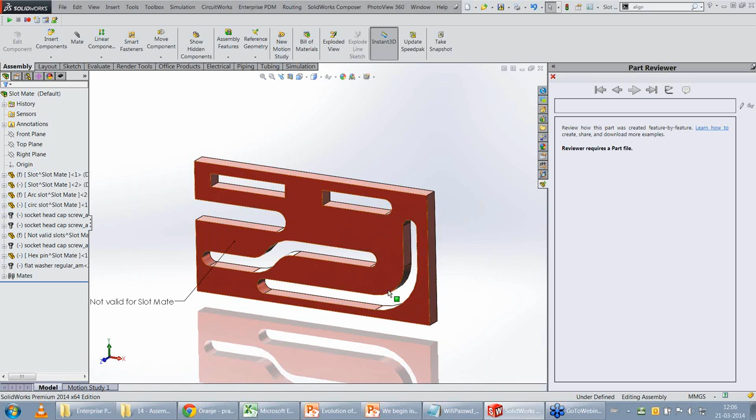You can also do circular slots on a cylinder with another circular slot cylinder. What is not possible at this point in Slot Mate is when you have one or more straight edges or open edges, that is not possible, and also when you have curved edges, that is again not possible. So these are some limitations that at this point we have in Slot Mate.

Explode with rotate, let me quickly show you that, and let's end the webinar there. I think we covered a good ground. Quick mate is, I'll show you how it works.

If you pick two reference entities for mating, previously what SolidWorks used to do is you have to go into the mate command and then do it. But now with the help of SolidWorks Quick Mate, as soon as you select two components or two reference entities, it will suggest what are the possible mating options you have. It will not give you a mating option which is not possible and which will over constrain. It will only suggest you the possible options of mating, like let's say tangent or coincident.

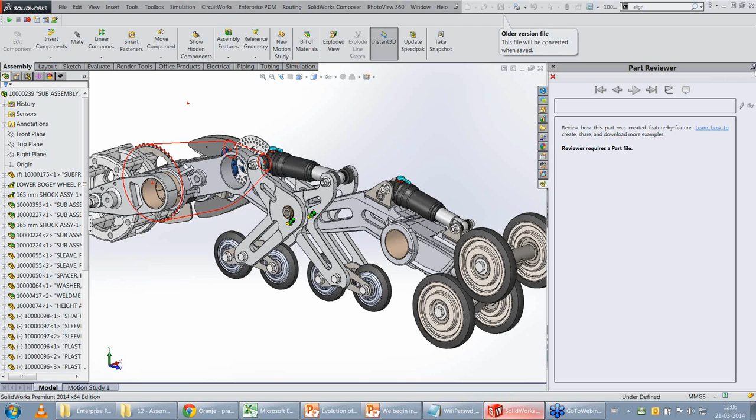So let me quickly create a simple explode view here, which includes rotation. So selecting both the components here, fasteners, and do it again.

This particular option called 'rotate about each component origin' should be checked. So when you move this, when you drag the component, first a linear explode happens in one direction, and then it will give you a circular arrow which is prompting you for rotation.

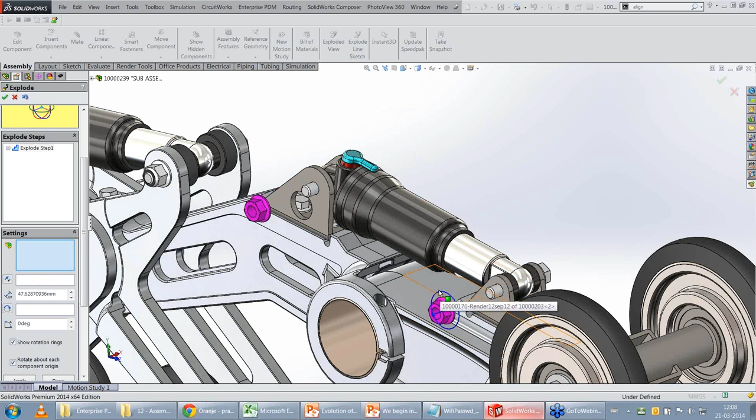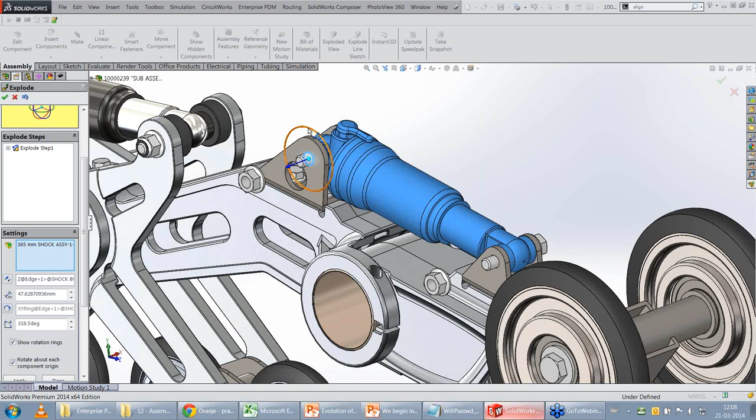So I can just pick this, and you can see that the arrows, or the components, are rotating about its own origin. So that's the first step. Next I can rotate this particular component about any other reference geometry. You can see that the explosion is happening with the rotation.

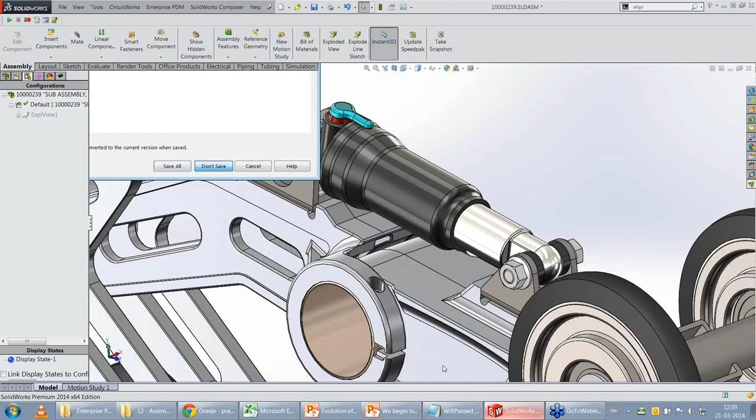So that's a new enhancement in 2014, and I think let's wrap it up here because we're running out of time. If you have any questions, please let us know.